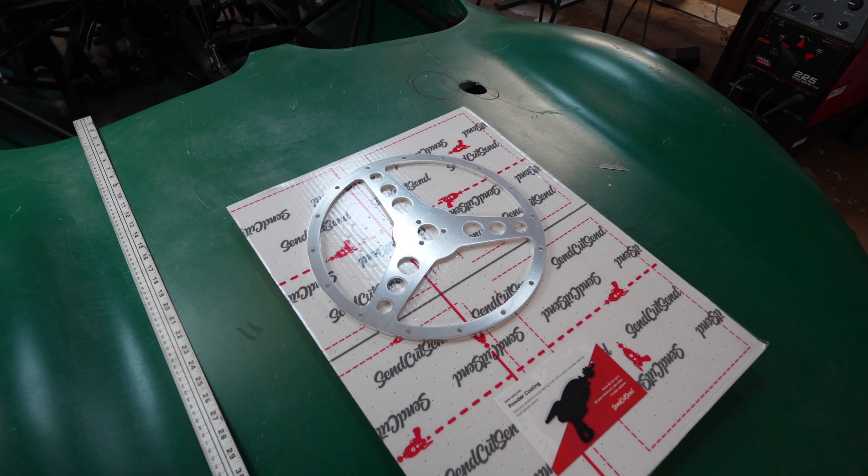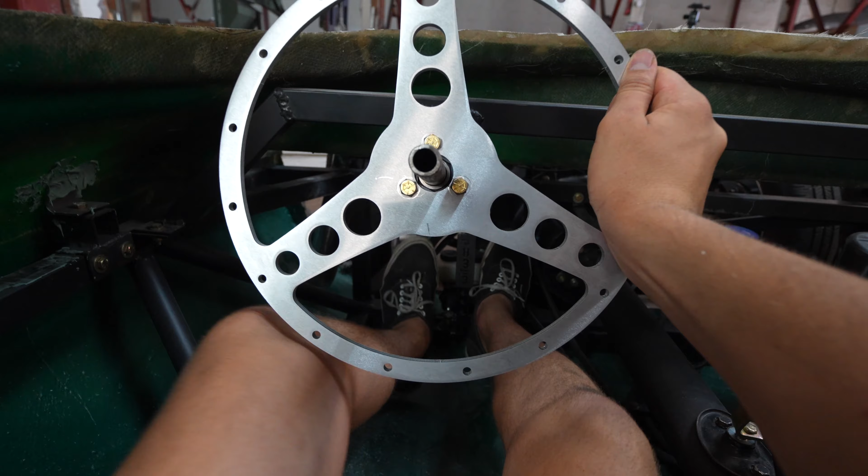As you can see here, it's 1/4 inch thick aluminum, 5052 I believe. And here it is mocked up in the car. Oh, I was so stoked, I had to jump in and give it a little pretend kick the clutch around. Yeah, I just fell in love with it.

So now that we had that fun, we're going to jump in and start getting the wood ready to start cutting our octagons out for our CNC milling.

Now that the wood is all secured, we can go ahead and upload the G-code to the OpenBuilds CNC. This thing's, we've definitely abused it, but it's a great machine, and yeah, let's get to it.

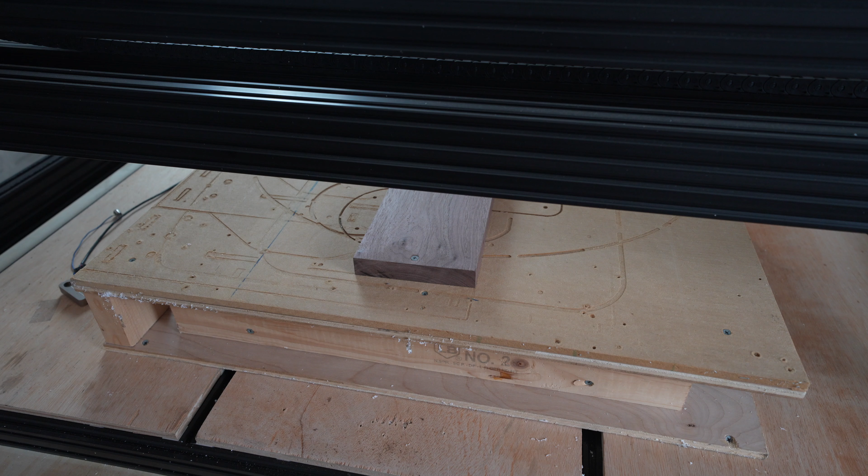Now that we get the G-code uploaded to the OpenBuilds CNC, I go ahead and probe it. If you don't know what probing is, it pretty much just allows the machine to know exactly where it is and where the stock is and its height, so it can start exactly where I set the toolpath to start at.

Once it's done probing and making contact with itself and completed that conductivity, it goes ahead and cuts. You could probably already tell that it's going to hit that wood screw, and it almost did. I stopped it and moved it to get it out of the way.

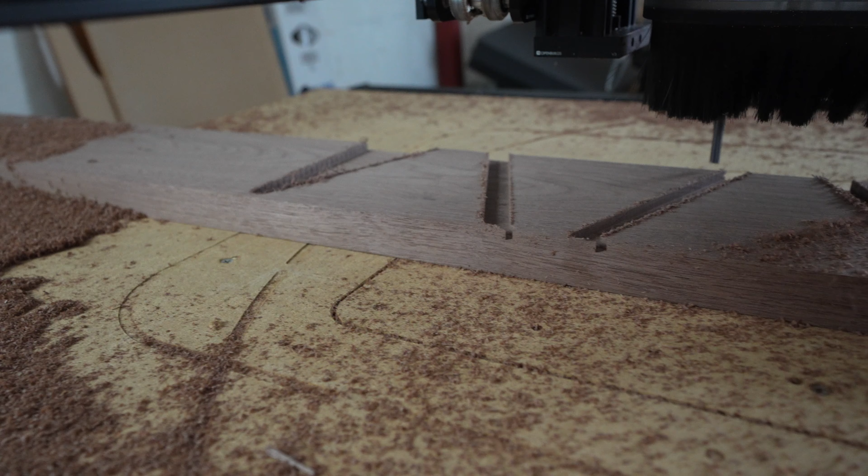After that, I just finished up cutting all those triangles. Once those triangles were done, we could sand them down and get them ready to make an octagon, and it was pretty easy.

I do wish that I had a more accurate machine to cut these pieces, and I did design a better tool path after I'd finished, but I decided just to stick with it and commit to this octagon idea.

What I'm doing now is laying down some saran wrap so the wood glue doesn't glue the piece I'm trying to use to the table. I'm using some Titebond wood glue, and after pushing them together, I used some wood screws to secure everything together, and made sure over time to put more glue in there, then sand it down.

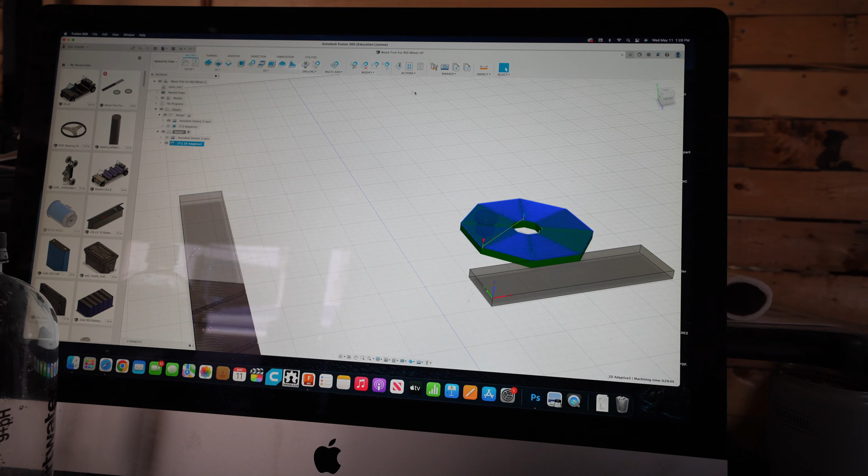With those pieces gluing, I jumped on Fusion 360 and decided to finish up my toolpath to get ready once those pieces were dry. Now, as you see here, this is probably the third stage of cutting.

The first stage was to level off that surface so I could flip it and it would be very even, so the pieces would come out as accurate as possible.

Now, the first time around, I made the mistake of cutting the whole thing without even doing the drill holes for the brass rivets that are going to go in and hold the wheel to the aluminum, which was a big mistake, because it moved the piece and I had to actually put my hand in there, and it was just a mess.

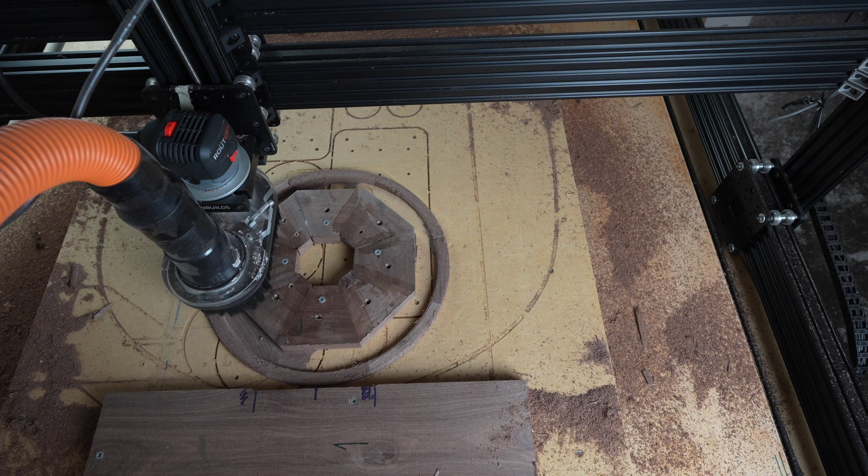But trust me, the second time around for the other side, I didn't make that mistake again. As you can see here, there's almost no material holding down the wood itself, but it still worked, and I'm really proud, honestly. Even though it made some mistakes, it still came out fantastic.

Now here's me sanding for hours, or just listening to music, chatting away with friends, just kind of trying to get some imperfections out and make it really solid.

I was using 600 grit, then progressing up here and there to 800, till I had what I thought was awesome. I was really proud of it.

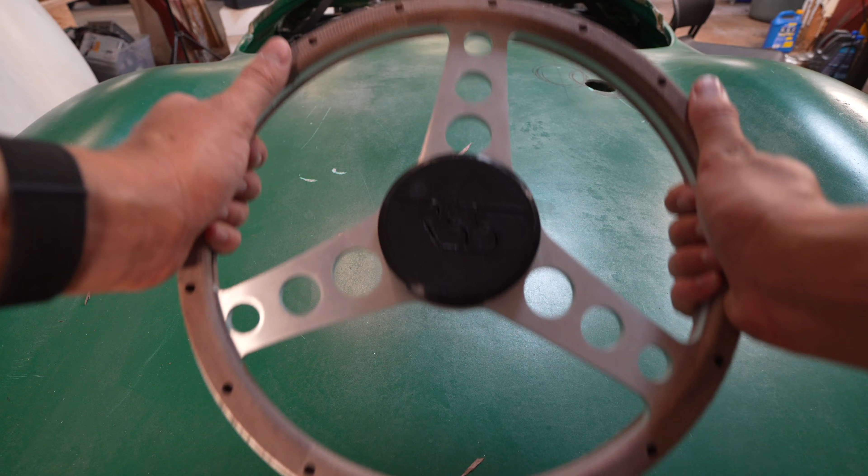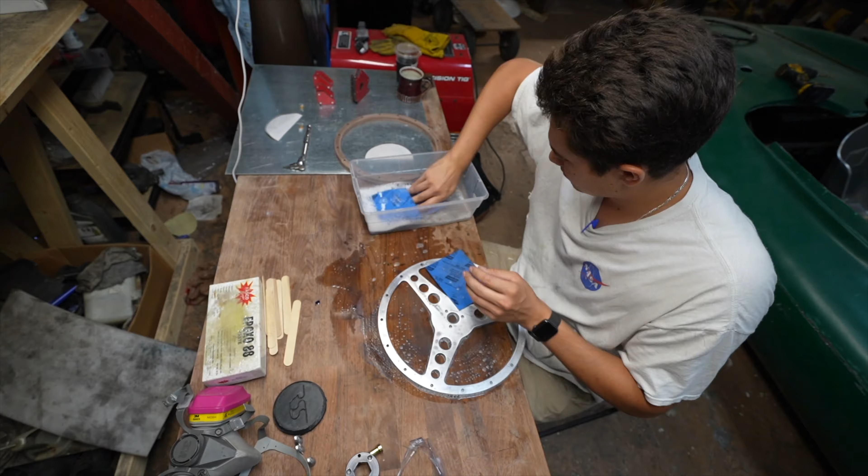The walnut was looking really nice with the aluminum, and here I am testing the brass, which I got at a local hardware store. Now it's time to actually polish the aluminum, because it's going to be a pain to polish it once the wood's all glued and epoxied in, and I don't want to damage the wood, especially after sealing it. So I spent approximately 4 days polishing it.

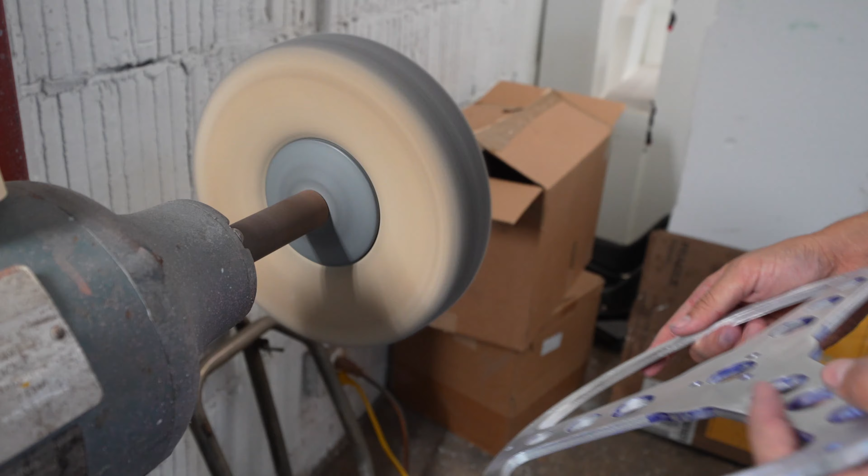After polishing it, I decided to jump on the wheel to try to spin it up, but to be honest, that didn't exactly go to plan.

So that wheel is a death machine. I've always loved it until now. It whacked the living hell out of my wrist. It's just gonna be a bruise, that's it. I was really worried because it threw the steering wheel into the stratosphere.

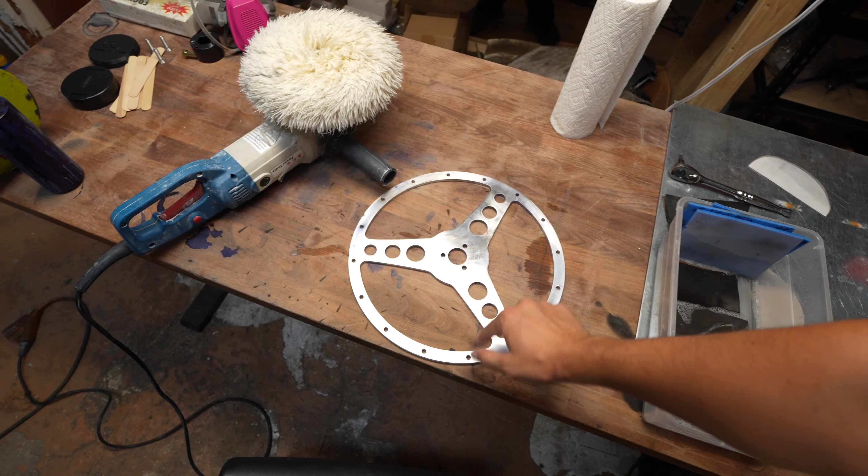I thought I dented it and I was really upset, but actually it's not too bad. It's still pretty solid, like, that's a little mark, but it's not bad at all. So I'm gonna use the hand wheel, screw it down, and hand wheel it and polish it that way.

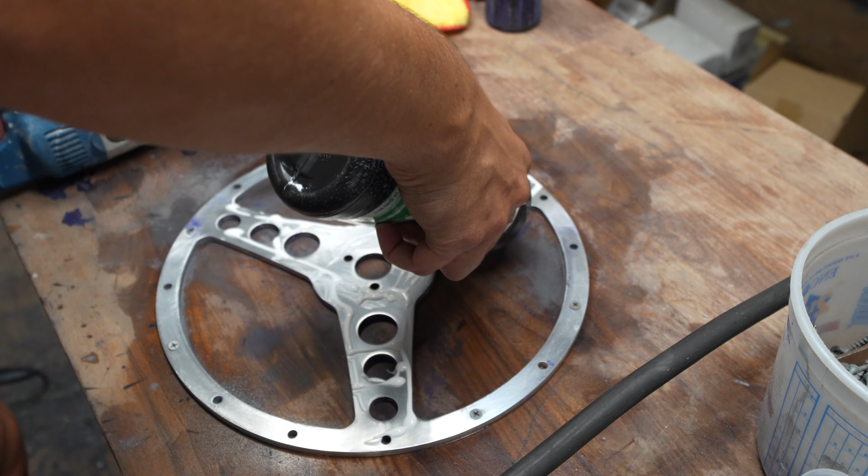So now that we decided to go the safer route and use the hand wheel, I'm going to keep polishing with this marine aluminum compound, dust it off, and start the process. I decided I needed to take out more material, so I used 1,000 grit wet sandpaper, constantly putting on that blue stuff which lets you see scratches and deeper areas where you need to sand.

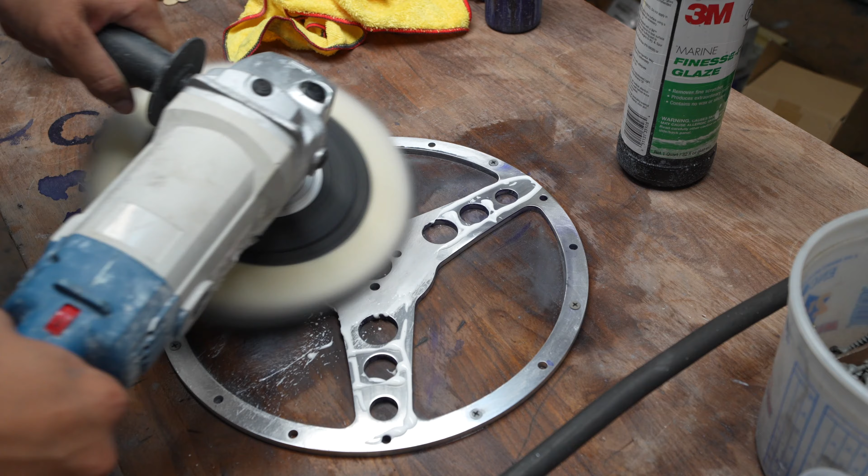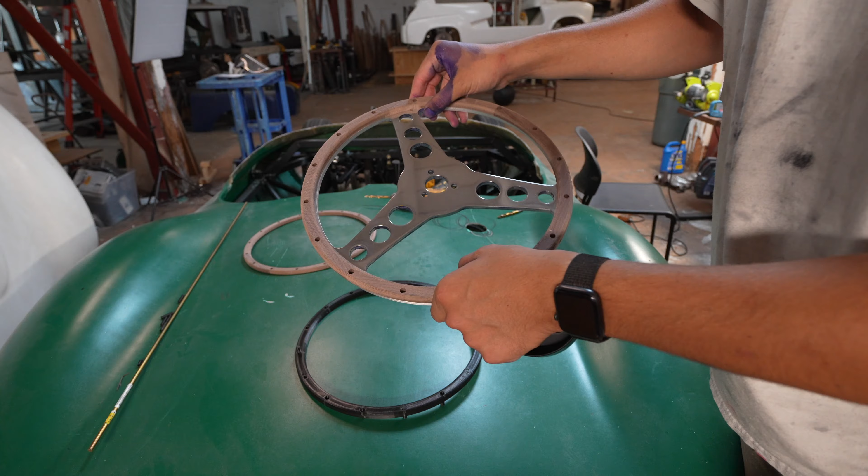After that, it was time to put on more 3M marine glaze, just keep buffing. It was pretty tedious and really messy, but I really loved how it turned out. It still looks hand-built. I didn't want it to be perfect because the car's not done yet. This steering wheel will see some abuse, so I wanted it to just be good enough. I didn't want to put a mirror finish on it.

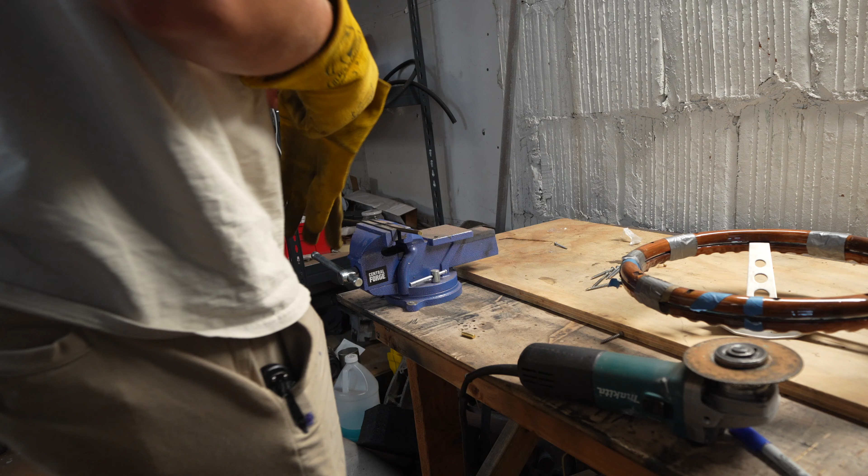I'll do that later on. If anything, I can just order more parts from SendCutSend. Now I'm measuring up my brass fittings, which will hold the steering wheel in place, sandwiching everything together in a sense. I'll be using a high strength 2-part epoxy to secure everything together.

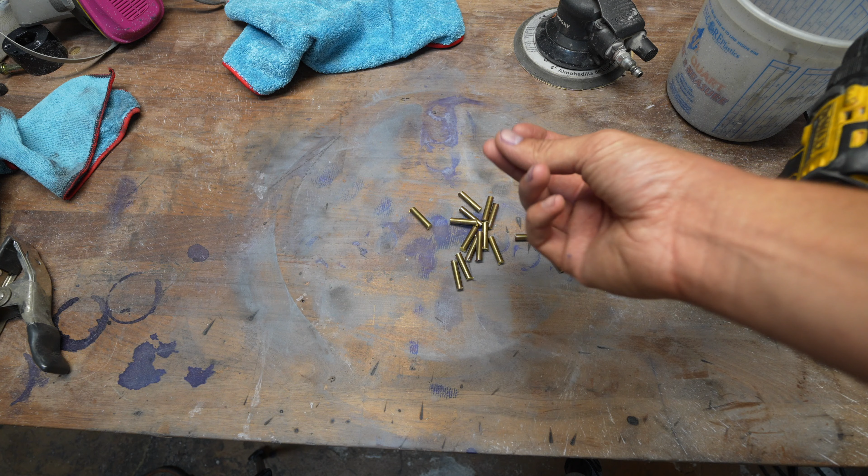And with that, we got some messy pieces, and with the snap of our fingers, we got some polished, ready to go, sanded brass fittings. After some test fitting, we can see that it's actually lining up pretty well. This is what you get when you CAD everything out before you build it.

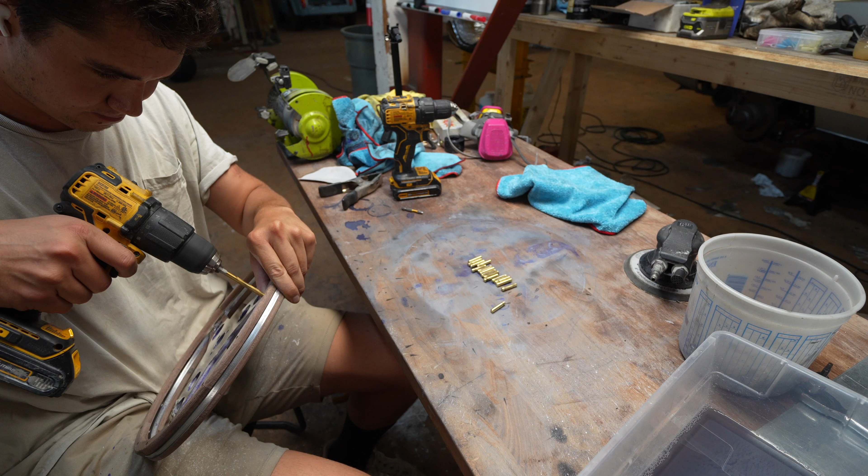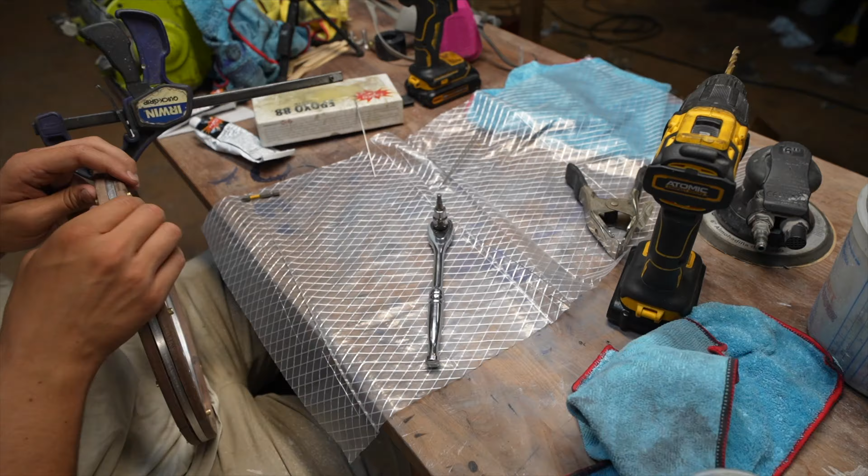There were some last minute changes and on-the-fly adjustments, but overall this was a completely CAD'd out project, and I really wanted to utilize the technology I had so I could add some accuracy to this build and save myself time and effort, letting the machines do my work for me.

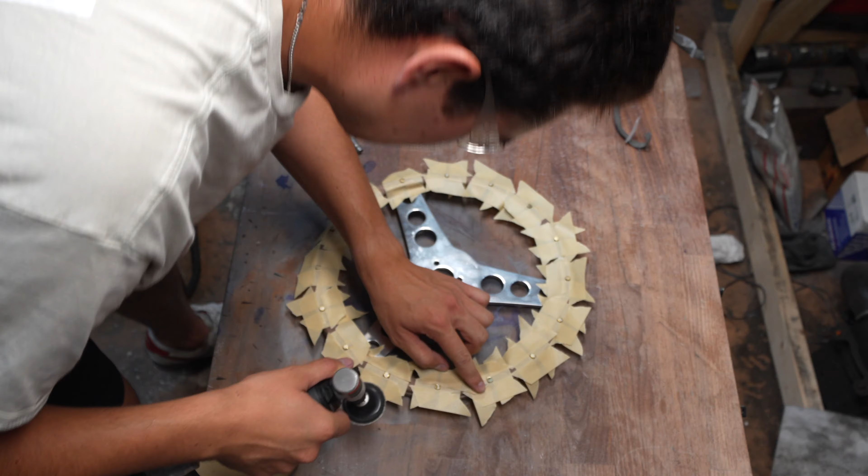Here I'm gluing everything, it takes a minute for each piece to set, and after that it's looking good. Now it's just a matter of sanding down those brass fittings so we can make a flush surface. I put some tape down so I knew if I was going too far, so I wouldn't damage the wood.

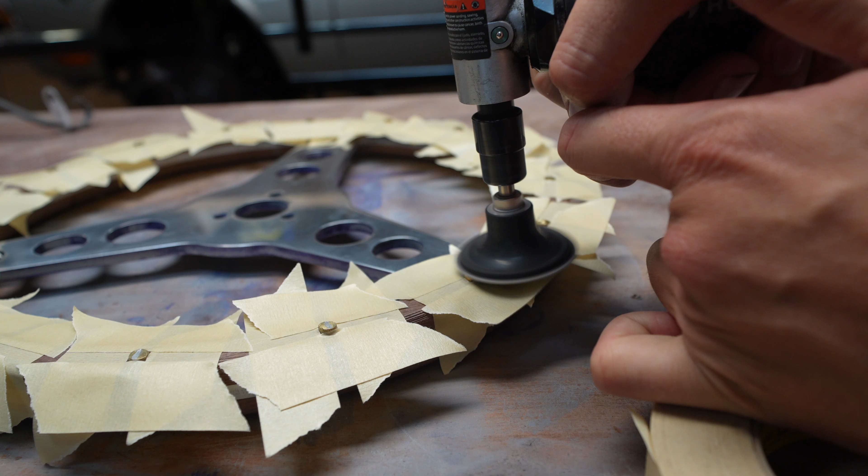So I could quickly be like, oh, the tape's going, I can stop on this one. I just went around the steering wheel for a couple tries, and honestly it turned out really well. The tape trick really worked out.

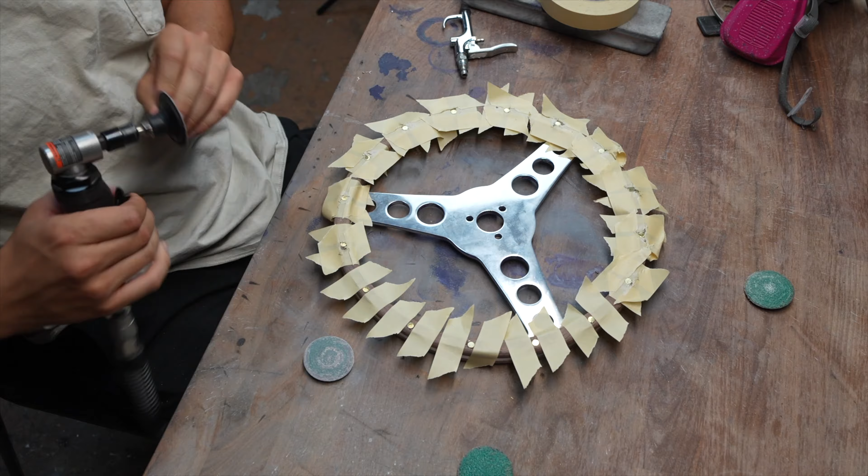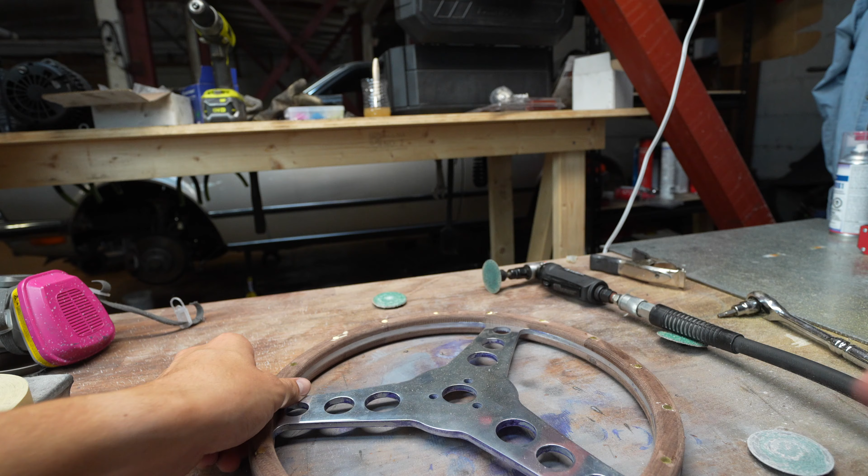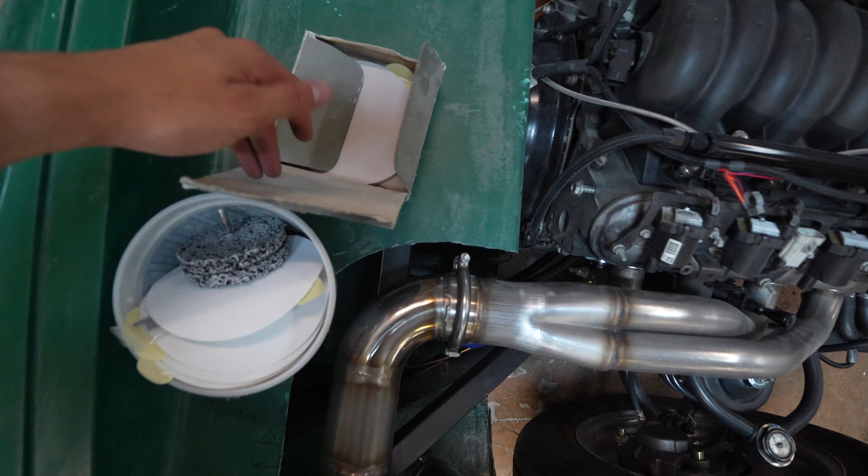Now that each piece is sanded down, we can get our first look at how the profile is, how thick the steering wheel is, how it feels. But here's the thing, it's not done yet. Even though that air sander does a great job, we need to hand finish it to make it perfect. So I grabbed a little 2x4, stuck on some sandpaper, and got to it.

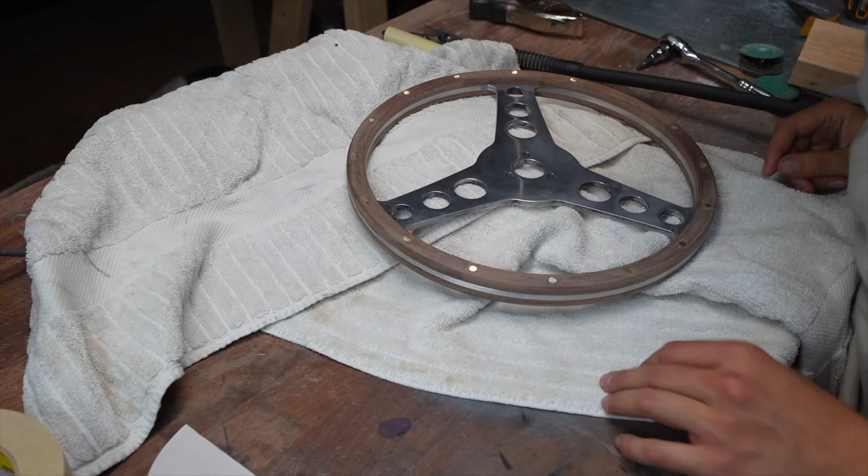At this point I realized I should probably be treating the wood surface pretty delicately, so I put a towel down and sanded it away delicately. This is 600 grit sandpaper that I'm using, and then I hand sand around the aluminum and wood section to try to even everything out so the surface is a perfect circle. Then I use an air sander to speed everything up.

After that, and after I felt like I did a pretty good job with the wood finish from hand sanding, I masked up all of the hard work we did polishing that aluminum and got ready to do the first 3 coats of sealing.

My choice for sealing it was this clear coat that I got from a store called Glue Products, where my factory is. Glue Products has plenty of options for any project you're doing, but after 3 coats and seeing the progress, I made sure to let it cure fully.

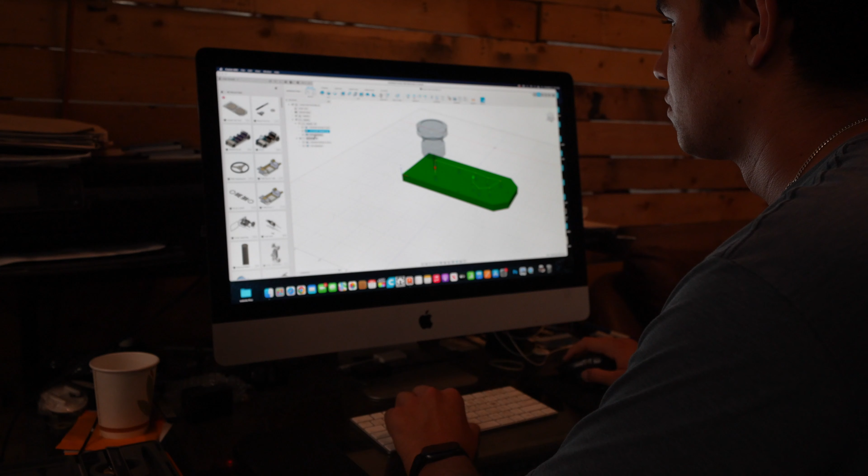I took that time to start my toolpath for my magnetic center hub. I had some aluminum stock that my friend pulled out of a garbage can, so I measured it up and got to work. It took a lot of effort because I wanted to make sure everything was perfect, and I knew my machine isn't rated for aluminum.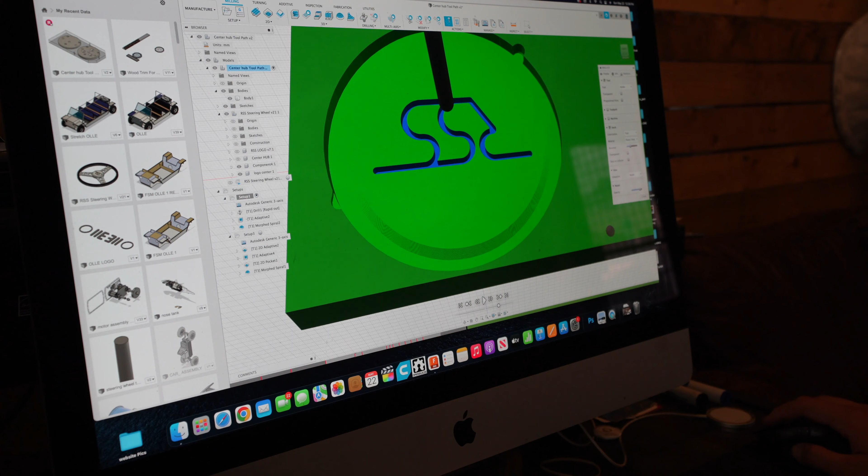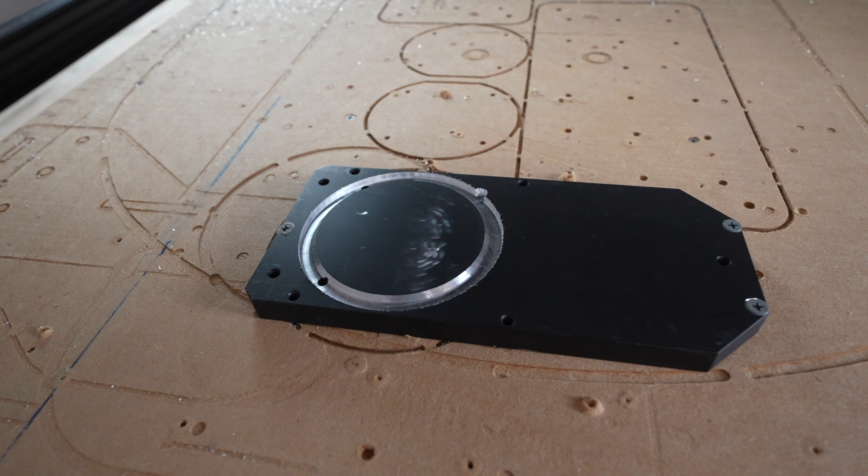It doesn't really have the RPM, the spindle at least doesn't, and also it doesn't have the strength to plow through material. So I took my time, took it easy, and even then it was still a struggle. The machine had issues. I never had bits strong enough. I'd mess up on cutting feed rate, things like that, because aluminum is still very new to me when it comes to CNC. But honestly, I'm not too disappointed with it. As a first try, I really want to get a nice Pocket NC or something larger that can sit on the desktop to do these complicated bits.

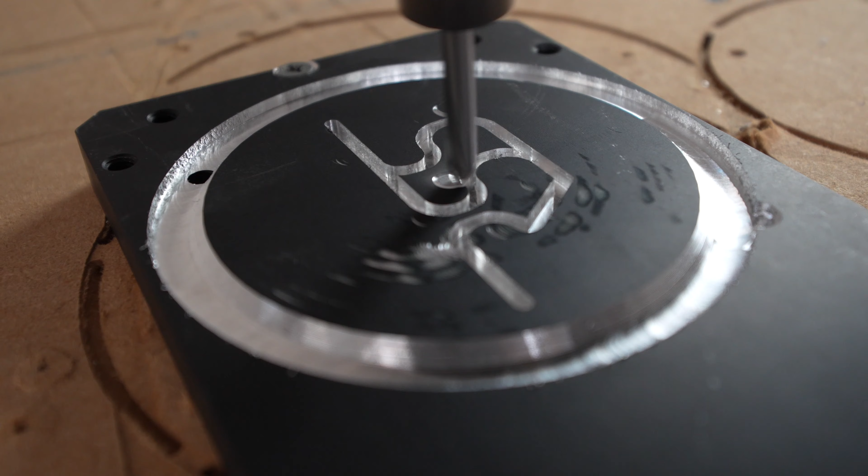Now what I'm doing here is engraving the logo onto the hub, and honestly it looked fantastic. Then I did a little finishing stage with a round bit, 2 flute. From there it was plowing material on the backside, adding those shapes and trying to get those pieces.

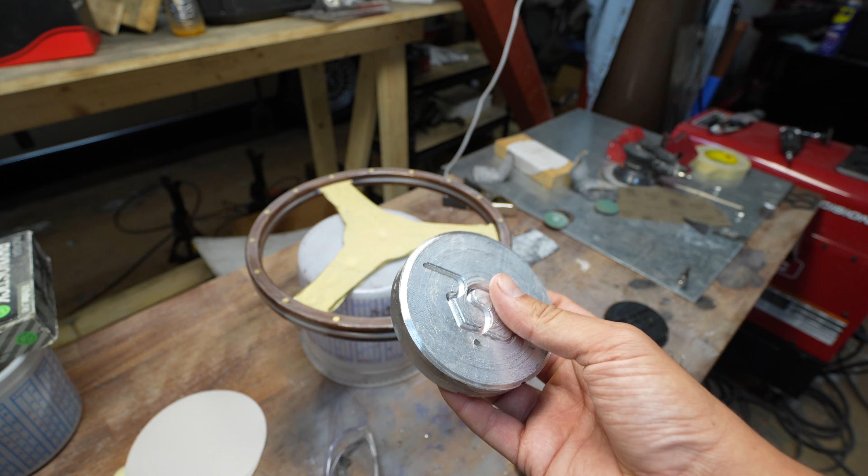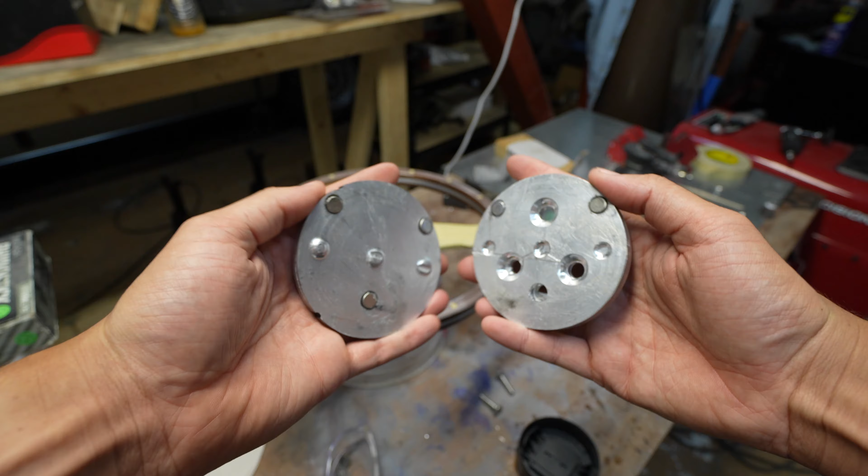And voila, the final product. I'm honestly really proud of it. It's not clean, it's got issues. I should have done each part on a single block of aluminum, but I had to save money and resources. So I got some super rare earth strong magnets, and bam, it just snaps together.

At this point I'm getting ready to do another 3 coats on the steering wheel. So instead of wasting my time, I grabbed some Sticky 500, put it on the air sander, and delicately took my time sanding everything away, getting rid of those divots where the clear coat soaked in, since the sandpaper wasn't able to penetrate. So instead of wasting time, I broke this out, gave it some pressure, and really got through. Only a few spots did I over sand, but I wasn't worried because the clear coat will fix it up and blend it well together.

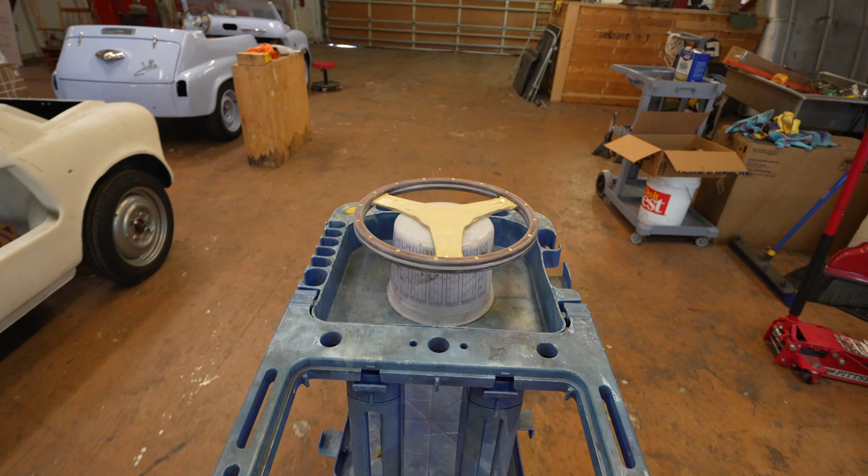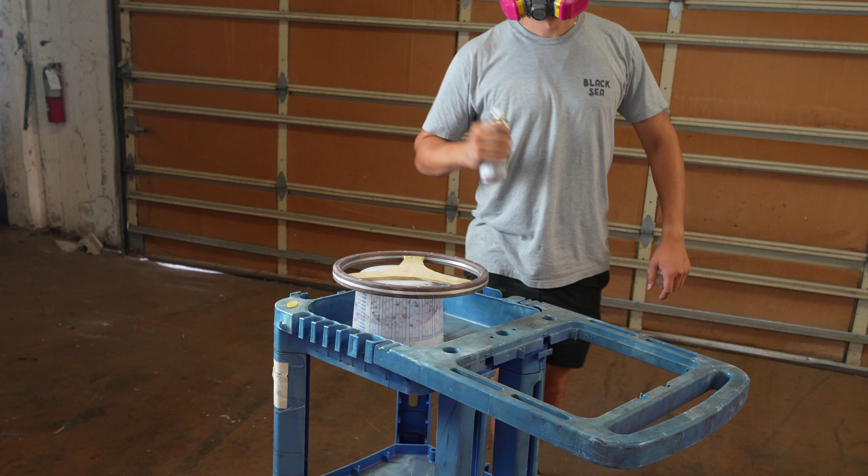After all that prep work, it's time to actually clean up the wood and not use any chemicals in case it affects the spray paint, because we're going to do our final 3 coats with this clear glamour I got at Glue Products. It's a paint where you inject the catalyst in from the bottom, and it'll last 3 days, and after that it turns into a brick in the can. But you get a better finish with these kinds of paints than the pre-catalyzed ones that catalyze via air or whatever. I made sure to take my time and take it easy, finishing this to my best ability, and honestly I got no runs and it looked fantastic.

And just like that, ladies and gentlemen, you have a steering wheel.

Now, the project did take some time, and this video did take a lot of time to shoot, so I'm sorry for not putting it out sooner. I've been in the middle of moving, to a new place that I'm living at, and you can probably see a clip right here of me putting it on the tow truck and getting ready to send it on its way, because I'm actually moving out of the unit I was currently working on the car in. But either way, we have the final product.

Here's the magnetic hub kind of working, and the whole reason for it was just so the mounting for the quick release would be flush, because I didn't want it to go through the logo, since I really appreciate it and like my logo for the car. Then the magnets go in like that, and there's locating pins so it stays secured where it's supposed to be. It doesn't rotate or anything like that.

But to be honest, this definitely needs work. This is the only thing I didn't like about the project. I've been looking at a Bantam Tools CNC for cutting it, and I'm really interested in their product. It looks very powerful and promising. But just look at the rest of it. It's just absolutely gorgeous. The aluminum's not perfect, but like I said, I didn't want it to be perfect.